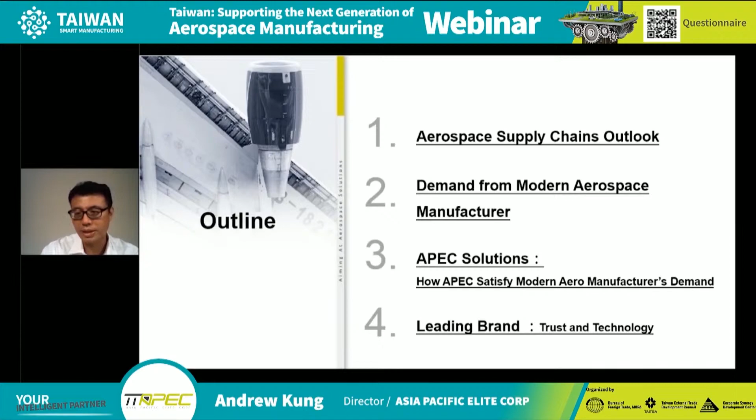Finally, I will tell you about advanced aero engines. It means that for the next generation of the aero engine, they need a very complicated machine to do the complicated casing, the complicated material, maybe combining nickel-based alloy and composite material. So in this trend, you will find the customers don't need just one machine, they need a whole production system.

And the second topic, I will share the demand for modern aerospace manufacturing. In this page, you will find the shape of a pyramid. It means that the global aerospace supply chain is led by the OEM. OEM means the aircraft maker or the aero engine maker, like Boeing, Airbus, GE Aviation, or Rolls-Royce. So in this area, OEM to Tier 1, the customers need very high automation and machines with very good intelligent functions. And they always ask for customer-made solutions. They can accept the high initial cost investment, but they always ask for very high overall effectiveness.

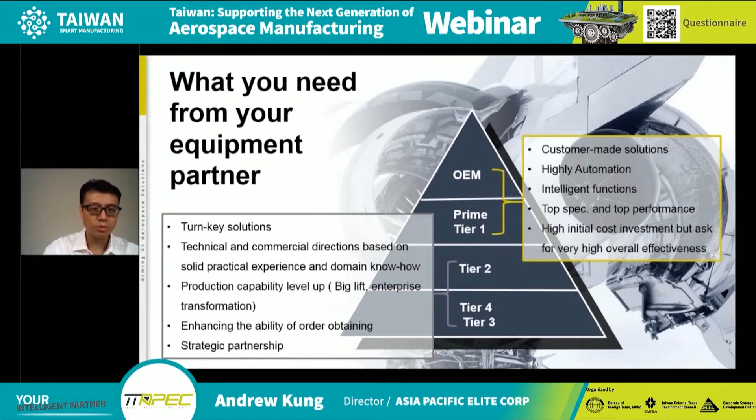So right now we know the change, the demand from the aerospace manufacturers. So the main topic for our seminar is how APEC can satisfy modern aero manufacturers' demand. On this page, you will find that with over 20 years of experience, we can offer the most complete product portfolio for the diversity of aerostructure parts and engine parts. For example, composite structure parts, especially very slim long parts, skin panel parts, or belly fairing parts, which are very huge parts. So we have solutions up to 10 meters to 20 meters.

For aero engine parts machining, from the blisk or the casing in the different segments of the aero engine, from the combustor, the compressor, to the intermediate segment and the turbine segment, we have machines that can cover from 800 millimeters to 2 meters in diameter of the different engine components. And for structure parts, no matter titanium or aluminum, no matter in the fuselage or wing structure, right now we have the full range of machine tools fit for the different requirements, from single spindle to multiple spindle and full 5-axis machines, and even over 20 meter machines that fit the different customers' requirements.

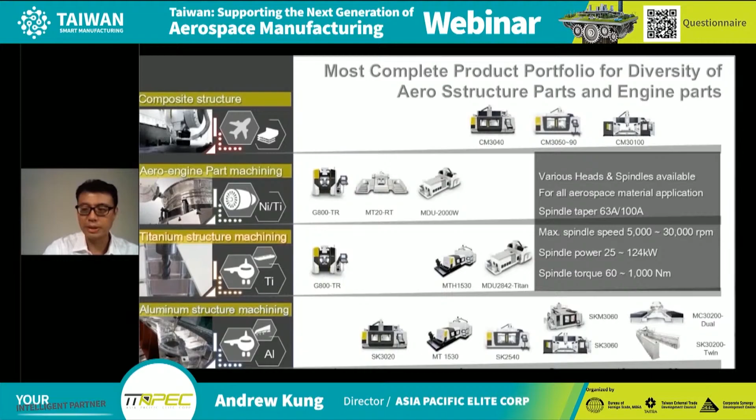So on this page, I will tell you that not only the machines, right now we have the capacity to fit the customer's very special requirements. It means turnkey solutions. If the customer gets a job but doesn't have similar experience or the technology, we can help to do the job study, and we do the time cost study. We help the customer build up the full preparation before machine installation. And after machine installation or production line installation, we can help the customer quickly start up and run up to their break-even point in a very short time.

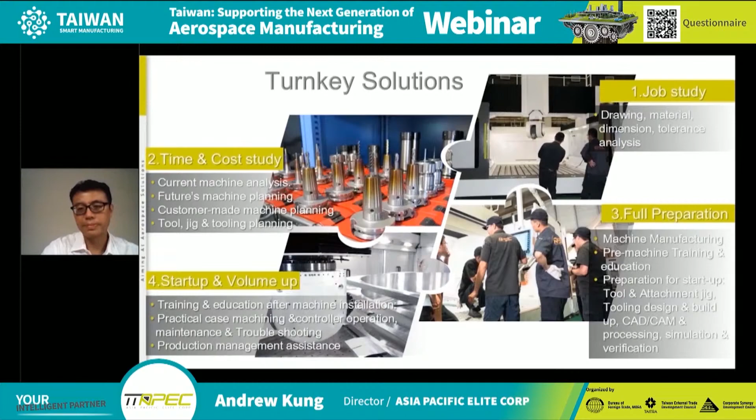Talking about smart manufacturing. Just like I mentioned, more and more customers need internet of machines or smart factory functions. So right now we have two kinds of solutions. One is line management, another is TIMS, meaning the intelligent manufacturing system. It means we can link all the machines to do monitoring and management, and we can develop for the different machines by customer requirement, including tool management, intelligent monitoring, or workpiece management. So we can give full support in smart factory functions development.

More and more customers right now need automation. Even though the supply chain outsourcing is from North America and Europe to Asia, it is not based on the low cost of Asian countries. They also need a high intelligence system. So more and more customers need automation. We can offer machines with a pallet change system or multi-pallet system. And we can even offer the flexible manufacturing system, like Joey showed. We can also give robot applications and a central chip disposal system.

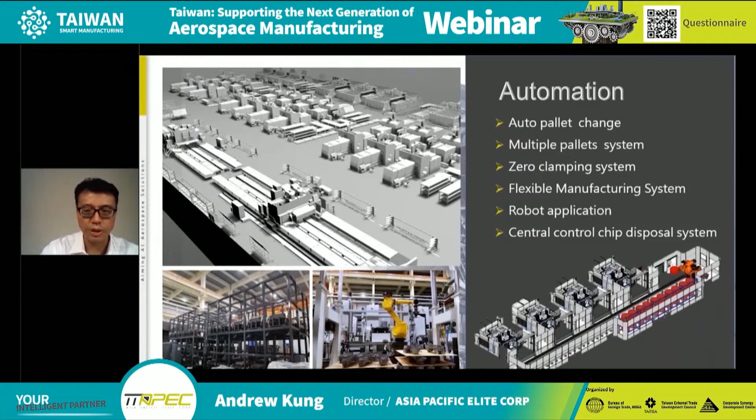When customers set up the production system, they always worry about talent. They don't have good labor capacity, and they don't have the operators or programmers. They don't have high level operators. So we can give a program. In the different countries, in the different aerospace clusters, we cooperate with academic institutes. We train the students and graduates to support them to get certification from APEC, and we give full training. After they graduate from this program, they can go to our customers directly. So it's a long-term relationship. We also try to devote ourselves to leveling up the whole aerospace cluster's capacity.

In this page, I want to show you our strategic partnership and the long-term relationship. It means that in the first stage, we try to guarantee the customer's production capacity. And the second stage, we help the customer to be the leading company in their industry, in the competitive environment. They try to be the leading role in their competition environment.

And the third stage, we try the best to keep the customer. They can keep the continuous growth, and we try so they can get a very good profit through our long-term relationship and through our complete product portfolio, our all-round service and our all-round technical support.

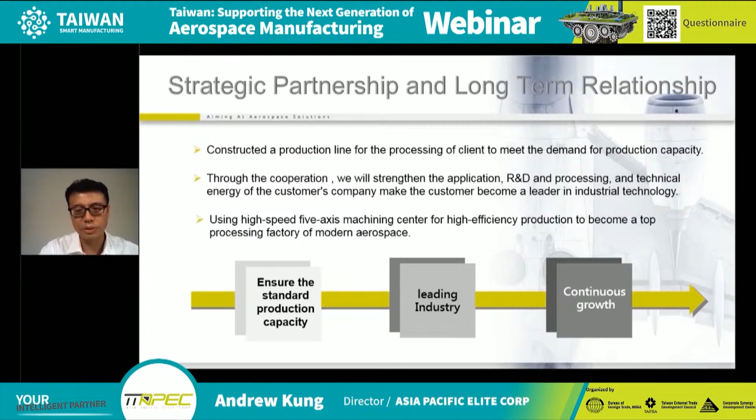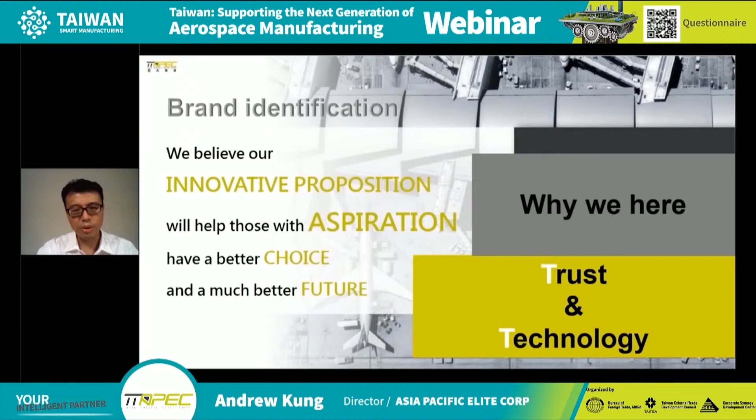So here I want to emphasize again why we are here, why APEC. We try to be the very unique aerospace machine solutions provider. So we build up the relationship based on trust and technology. And we believe our innovative proposition will help those customers with the aspiration have a better choice and a much better future.

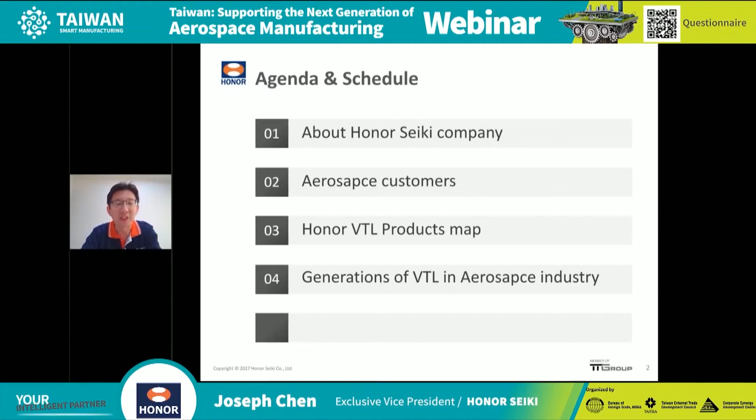Okay, thank you. So I'm Joseph Chen, I'm from Honor Seiki. Honor Seiki and APEC belong to Tong-Tai Group, and we have a similar philosophy and the same working attitude to work with our customers. So today is my agenda. The first portion will be about Honor Seiki company. Second, aerospace customers. Third is our vertical lathe products map. The last one is generations of vertical lathe in the aerospace industry.

So first about Honor Seiki, about us. Our mission is to listen to customers' voice to become their most valuable vertical lathe builder, by innovation, responsibility, and sustainability. We are located in Taiwan, and we just make vertical lathes. We just focus on vertical lathes and offer turnkey solutions to our customers.

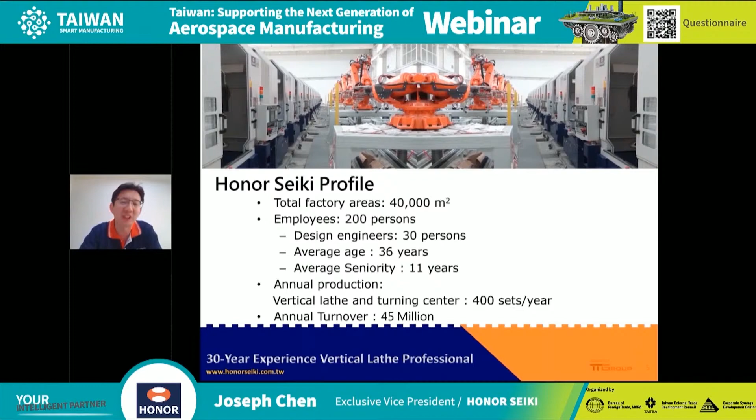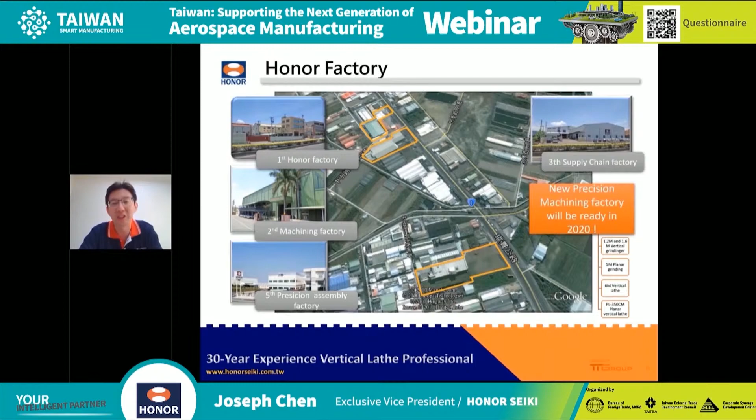We are pretty young, average age 36 years old, but we also have 30 years of experience. We build about 400 sets of vertical lathes per year, and roughly 30% of our products are sold to aerospace customers. We are all located in Taiwan. We have 5 factories right now, and even though it is a little bit difficult time for us this year, we're still expanding because we are also building our new machining shop.

So about our history. In the year 1999, we already sold the first vertical lathe into the aerospace industry. In the past 21 years, we cooperate with our customers, listen to their requirements, see the challenges they had, and try to offer solutions to extend the performance of our machines and make them more profit.

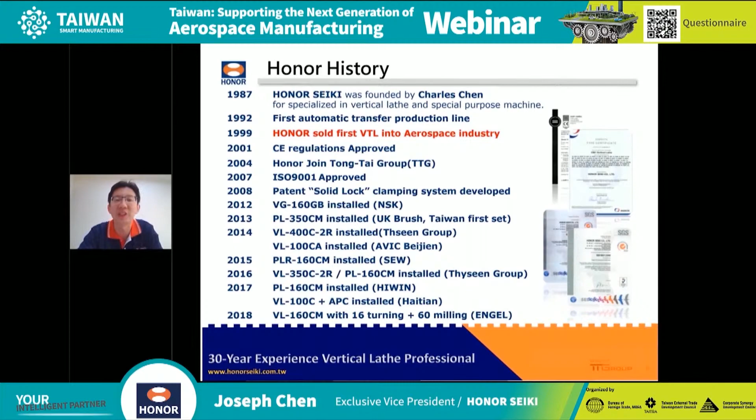So here is some gallery of our factory, and the character of my factory is air conditioning inside, especially in summertime, when Taiwan is 35 degrees. Air conditioning for 2 reasons. First, to make the machine stable. Second, to make my engineers happy. If they are happy, they will make happy machines for my customers.

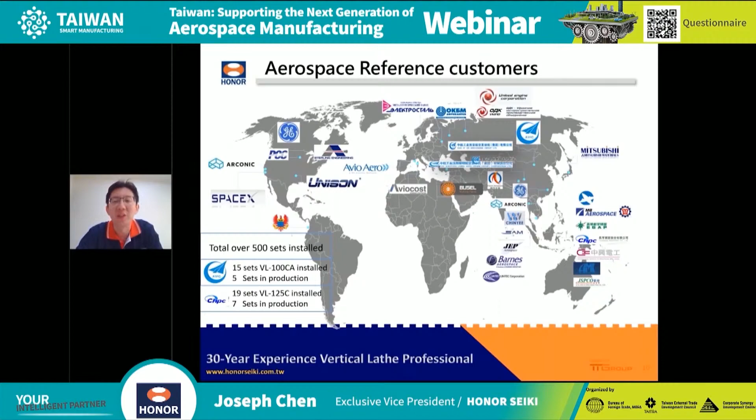And second is our aerospace customers worldwide. So here are some reference customers worldwide, including in America, GE, suppliers including Arconic, PCC, and even Unison. And then, for example, SpaceX, they fly the rocket. We are proud of them. And in Europe, all the Safran suppliers are our customers. And in Singapore, in Taiwan, we have very high market share.

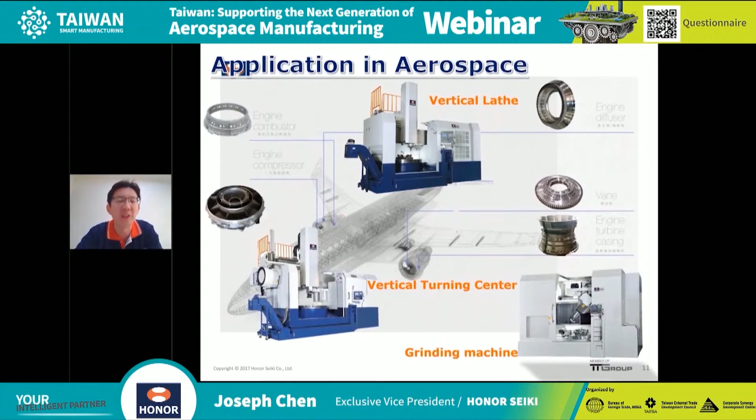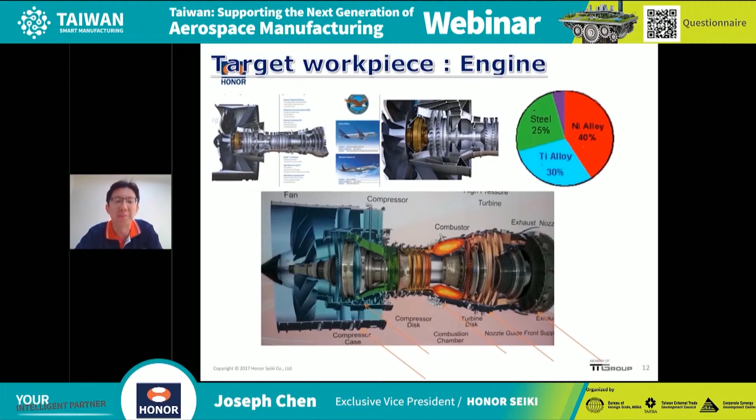So the target workpieces for vertical lathes, most of them are combustor, compressor, casing, and engine. This kind we call hard turning material, like nickel alloy, titanium, or Waspaloy. According to the new engines, for example the LEAP engine or some other new engine coming to this world, the material right now is 30% titanium, nickel alloy 40%, and some special blades are made of Waspaloy.

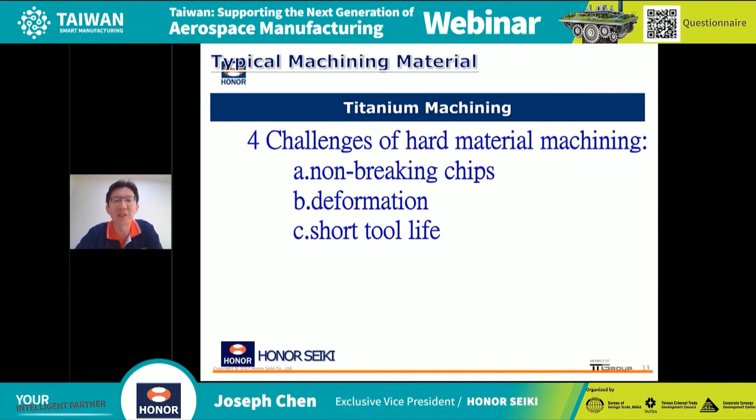So actually for this kind of hard turning material, there are 3 challenges. First is non-breaking chips. The engineer needs to stop the machine to clean chips. Second is deformation. They need to stop machines also. Third is short tool life. These 3 challenges make machine utilization very low, less than 50%. So for the customer, stability, rigidity, and efficiency of the machine need to be considered.

So according to that, finally, I will offer our solution in the last page, and now I will come to our vertical lathe product map. It's our whole vertical lathe line. If we look at the orange line, we call it the standard vertical lathe, and the upper line is the blue line.

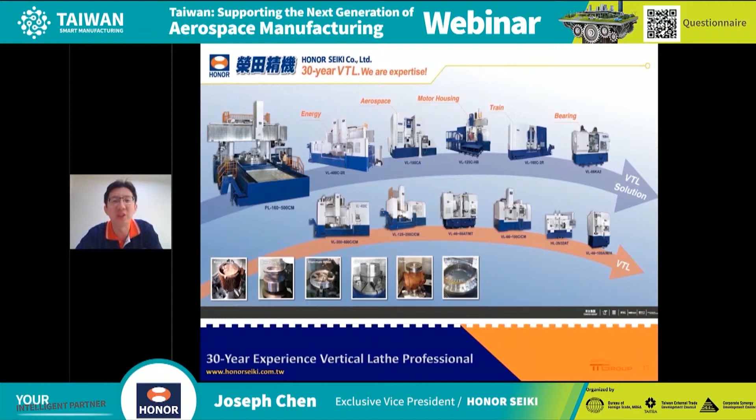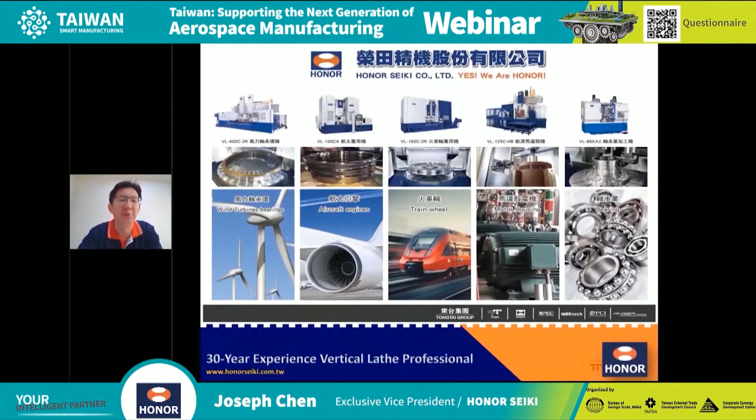We call it the VTL solution line. The solution line means we offer total solutions, for example, to wind power rings, to aerospace, to train wheels, to motor, or to bearing makers. So we use different technology in different industries. For example, hard turning for bearing technology, high pressure coolant for the aerospace industry, and the super heavy and strong structure for the train wheel solution. So we combine and transfer different technology across different industries, and this is a very reliable technology for the customers.

And then I will quickly introduce the different generations of vertical lathe for aerospace. The first generation is, I'd say in one word, reliable. So the first generation is a reliable vertical lathe for customers. We installed over 300 sets worldwide. In the second generation we upgraded the machine rigidity, machine structure, and the clamping system, and the other things necessary to increase machine rigidity. So by this way, in the second generation we increased tool life by 20 to 50%.

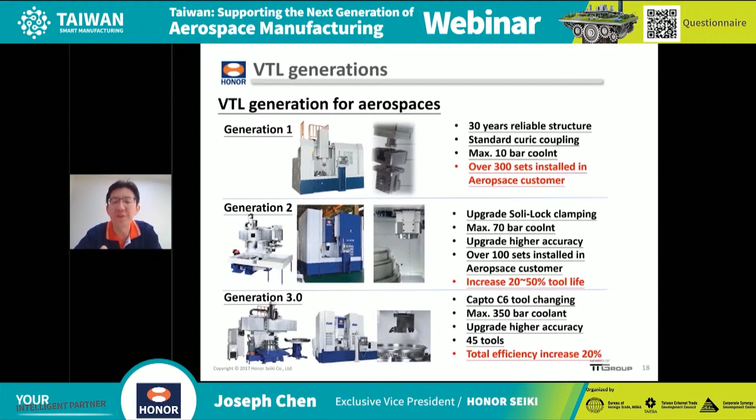And the third generation is efficiency. So we redesigned the machine with 45 tools, and then high pressure coolant to break chips, and then much higher accuracy so that we can use online measuring. So by this way, total efficiency can increase 20%. So based on that, we can offer more tools and more solutions to customers.

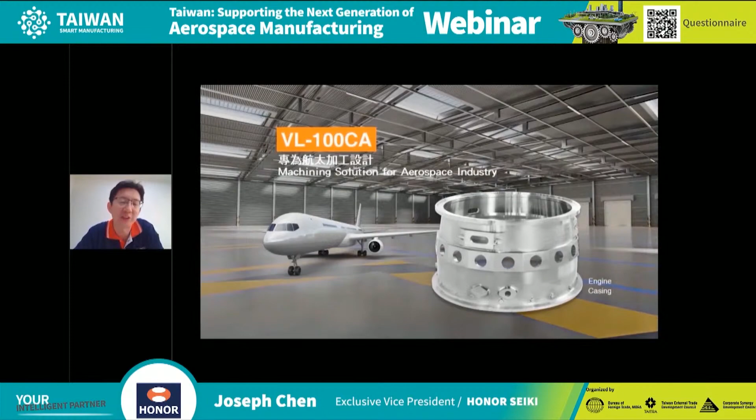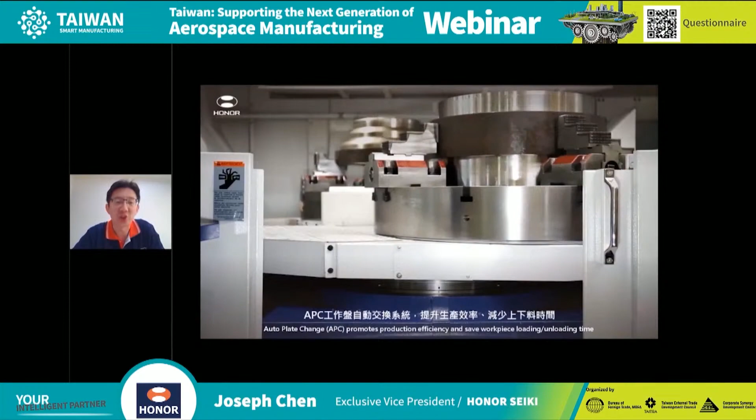And then I will play a video of the latest generation for customers, and you can take a look at this one. So this machine is 3.0 plus pallet changer. With this kind of pallet changer, we can make a pallet change within 30 seconds. So this is about a 1 minute video. This is an automatic pallet changer, 30 seconds to change 1 pallet. And then the stroke for the X-axis and the Z-axis.

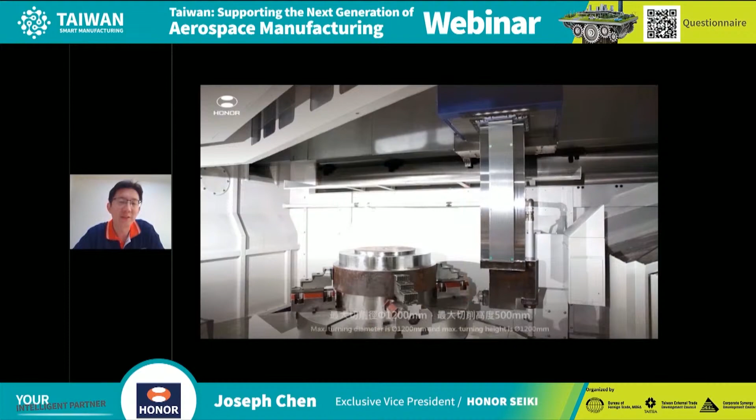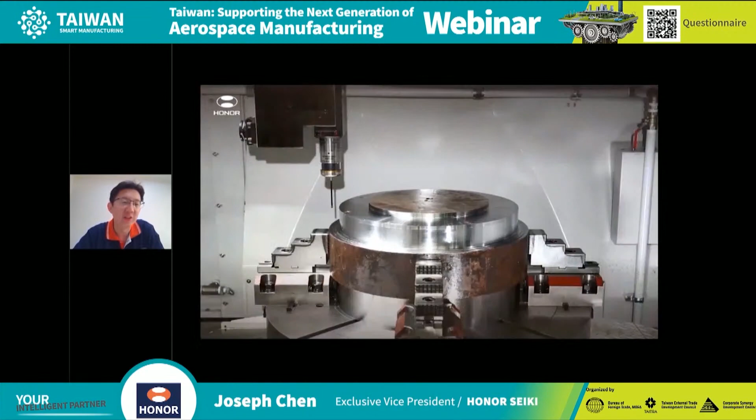And then this is a very high accuracy and high speed spindle. So by increasing the machine rigidity and accuracy, we can use online measuring, then we can get accuracy. So this is the automatic loading and unloading RFID tooling system. So this is a 45 tool capacity. And then by online tool presetter and the proper calibration system, we can do all the turning and measuring online.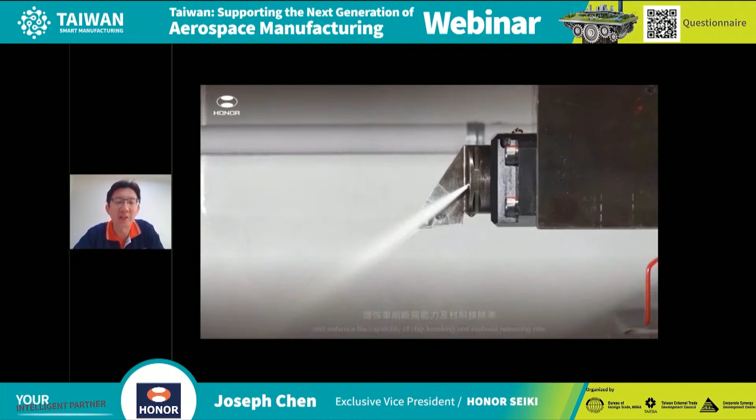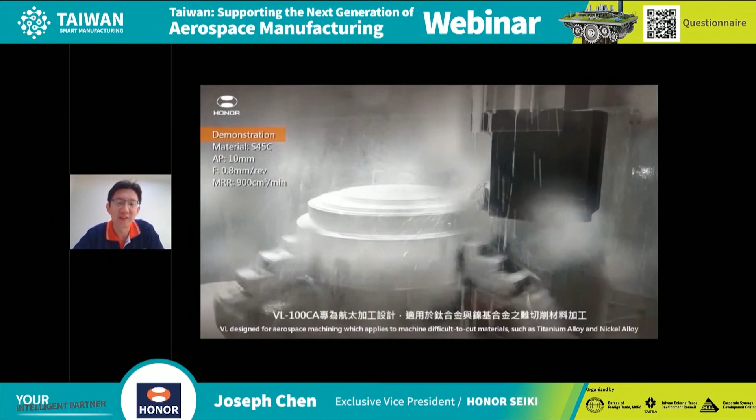So with 100 bar high pressure coolant, you can see the chips can be broken. Okay, so this is finish turning, using a very high precision cross-roller bearing. Okay, so our philosophy is to be an aerospace success partner.

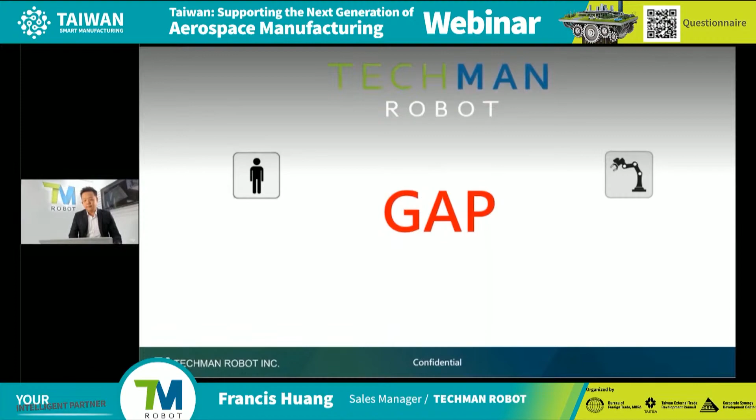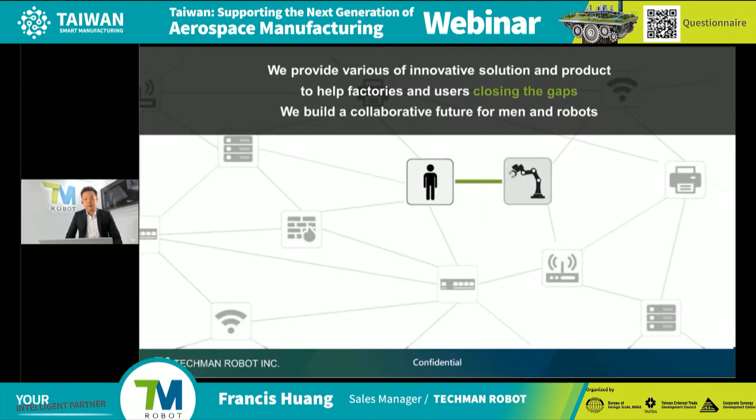Well, at the beginning, we found that traditional industrial robots are very hard to use. You have to be very familiar with robotic language. Otherwise, it's going to be very tough for people to program for a specific application. And there is the gap. This gap is about friendliness, and at Techman Robot, we innovated something, and we'd like to close this gap. So we provide various innovations and products to the market to help factories and users close the gap. We build a collaborative future for mankind and robots.

Just a little bit of information about Techman Robot. We were established in 2016, so 4 years old right now, a pretty young company. But behind us is Quanta Group. Quanta Group is one of the most famous and valuable computer OEM companies in the world. Okay, so about Techman Robot, we have capital of about $16.67 million US with more than 500 employees globally.

And we have our headquarters here in Taoyuan City, Taiwan, with branch offices in Korea, Shanghai in mainland China, Shenzhen in mainland China as well, and the Netherlands. Our major purpose is to design and manufacture smart collaborative robots with a built-in vision system and provide automation solutions to the market. At the moment, we are at the second place.

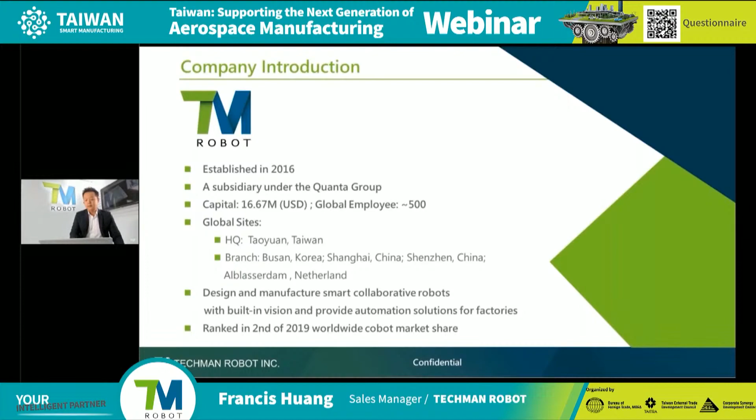This is the map where you can find us in different regions: North America, Central America, and South America, Europe, China, Japan, Korea, Taiwan, and even Australia. We have a very well-done distribution channel there to provide service to our customers.

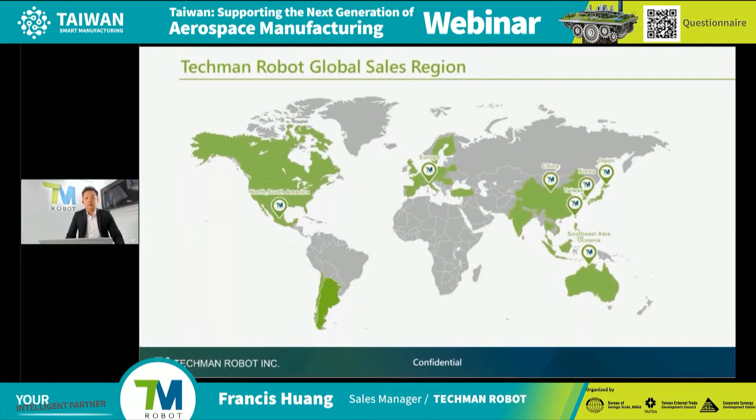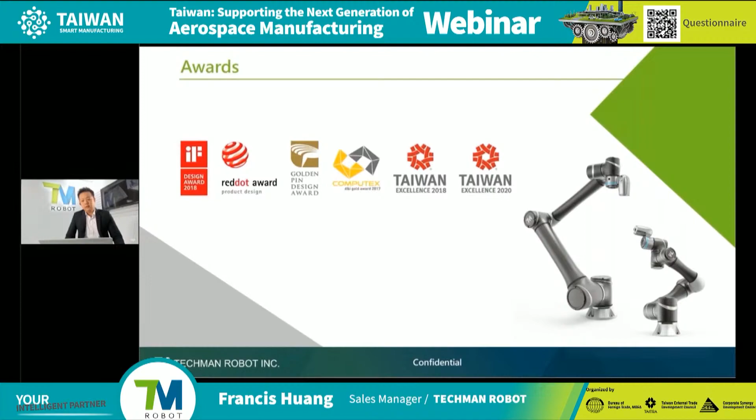These are some of the awards that we collected from time to time: 2017 Computex, 2018 Design Awards, and we have Red Dot Awards as well. And in both 2018 and 2020 we got Taiwan Excellence.

So back to the question, why do people need Techman collaborative robots to help them in their production line? I will say 3S: smart, simple, and safe. Those are our main characteristics. Smart, with the built-in vision system, it makes things easier. Simple, we provide a user-friendly user interface. No need to be familiar or professional in robotic language, it's just like using your mobile phone. Once you recognize the icon and understand its meaning, with some simple logic, you know how to use our robot.

Safety is always our first priority. Whether it's CE certification, 15066, or 10218-1, those are all safety standard certifications that we have. And we also have other safety standards for different markets, and you may check them out on our website.

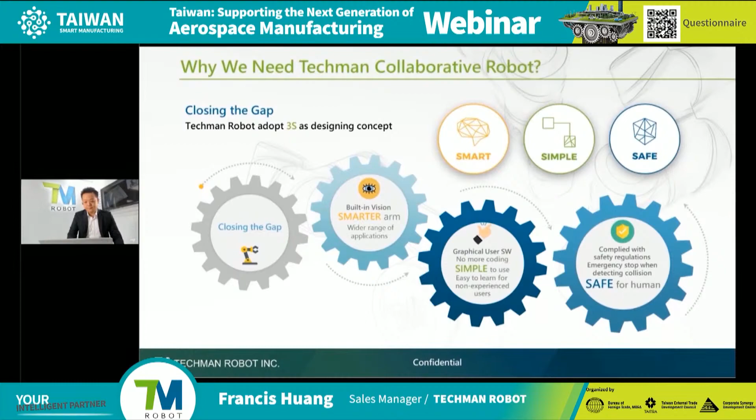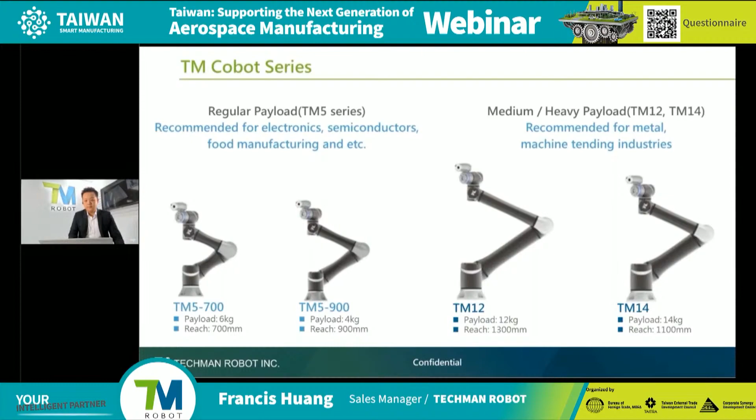About our cobot series, we now have 4 models, differing in payload and reach, 4 kilograms to 14 kilograms, 700 millimeters, 900, 1100, and 1300 millimeters. But you might notice that all the models come with a vision system. And we also have a model for AGVs or any auto car that can work along the production line.

So here I've got a video clip about aerospace that I would like to share with you. Aerospace case study, AIDC. It is a leading aircraft company, one of the most famous, with more than 5,000 highly skilled employees. This company has 4 major business entities, and this application comes from one of them, the aero engine factory.

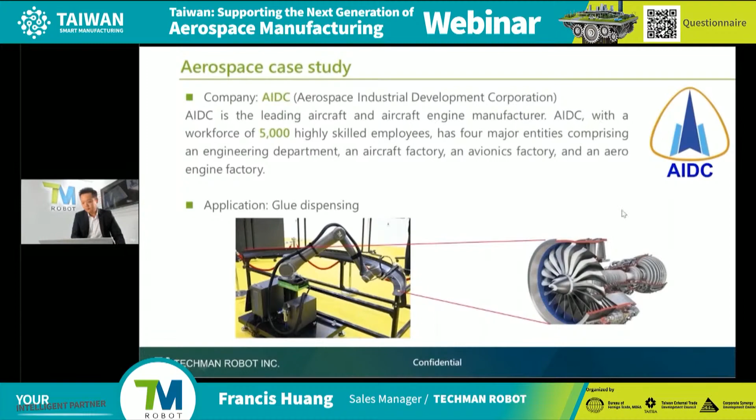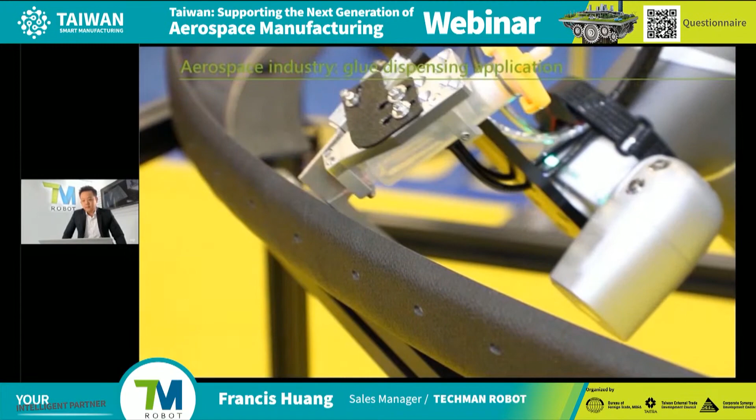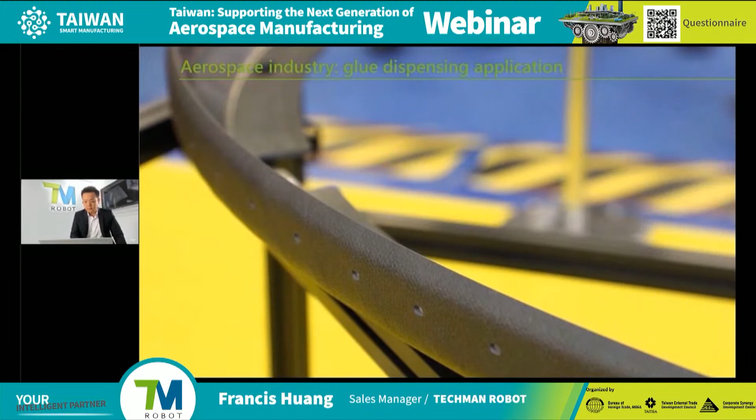The object you can see on your left-hand side is a quarter-circle component of the airplane engine, which you can see on the right-hand side, right? So this is the video clip that shows how we manufacture the aerospace parts. You can see the robot arm is following the path, the edge of the part, to make sure it is well glued. You can see the arm follow the edge very clearly, very carefully.

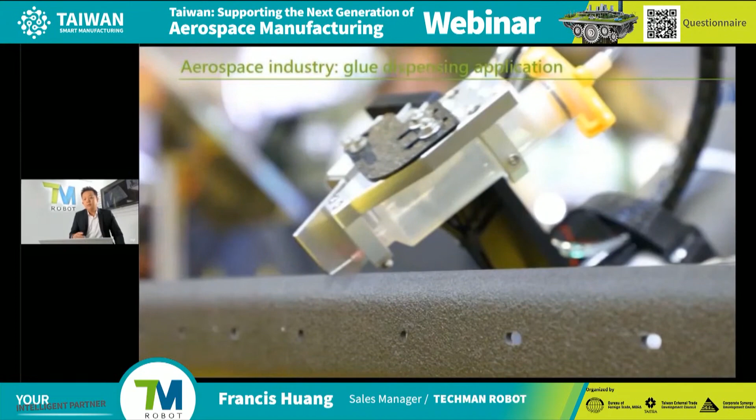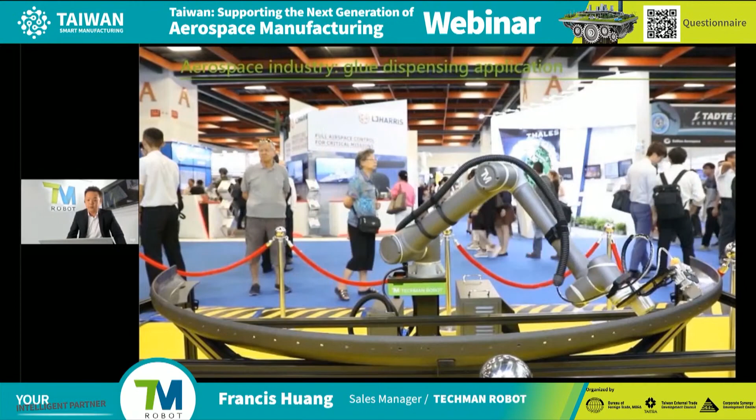This object has to finish one side and then automatically turn to the other side to make sure all the edges of the quarter circle are well glued. We played this demonstration in one of the exhibitions to show what we can do, what our capability is. All those jobs used to be done by laborers. It not only cost a lot of time, but it was also hard for management to control the quality and the yield rate.

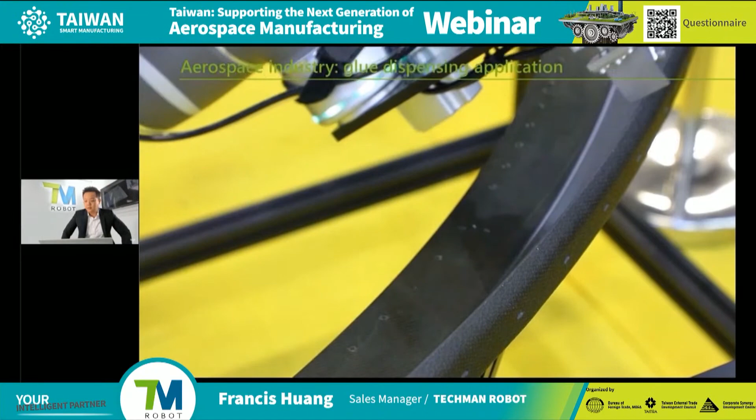So this application with Techman robots actually decreased the cycle time by about 90% and saved the factory 2 laborers' costs, while increasing the efficiency and the performance quality.

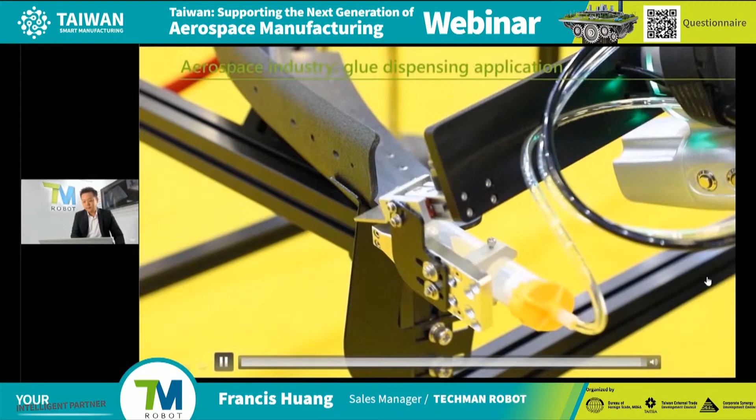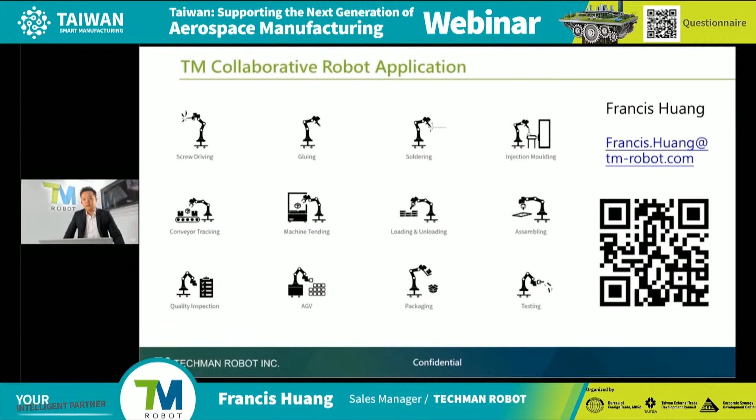My name is Mel Gay. I'm Regional Sales Manager for YCM Technology, Yeong Chin Machinery Industries Company Limited. For those of you that may or may not know, YCM was founded in 1954. It has 66 years of experience in machine tool manufacturing. Vertical, horizontal, double column, 5-axis machining centers, and CNC turning centers are all quality products produced by YCM.

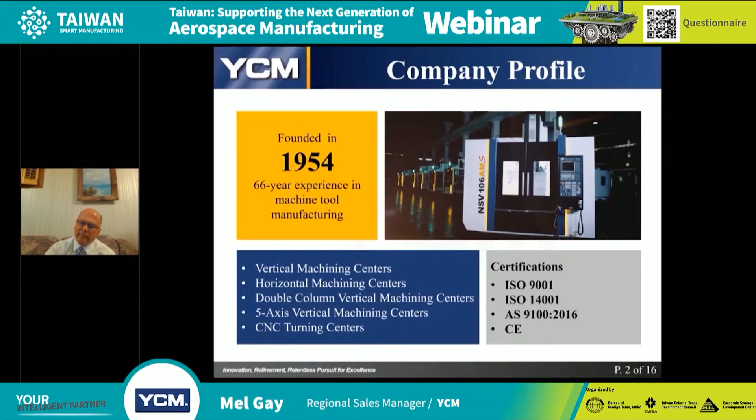Certifications in ISO 9001 and 14001 show our dedication to the quality of our build-up products as a vertically integrated company. We have a worldwide sales network of over 50 sales and service locations globally.

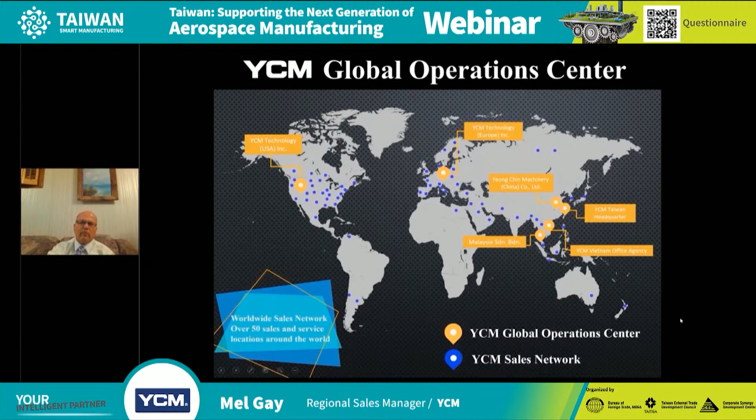From engineering and design to pouring our own castings in our foundry, precision machining, best practice assembly, quality control, and shipment and packaging to our customers, YCM is dedicated to producing products in our vertically integrated factory. YCM services many industries: aerospace, automotive, die mold, micro machining, and job shop are just some of the various customers we service.

Let's take a look at the aerospace and defense industries. These components, whether they're aircraft components, artillery, weaponry, tanks, radar, or other military equipment, comprise a large portion of a market segment. Either these components, parts, or finished products are manufactured by customers that invest in high precision and highly accurate machining. Technological advances play a key role in these industries.

Let's talk about the aerospace market forecast. Boeing has predicted over the next 20 years 44,000 new planes valued at $6.8 trillion. The commercial aircraft will be $3.1 trillion in coming years up to 2028. Aerospace and defense will contribute to this industry and are highly stable, which allows for various diverse applications of equipment and supplies. Some of it will be in the service sectors, as well as defense and new aircraft sectors.

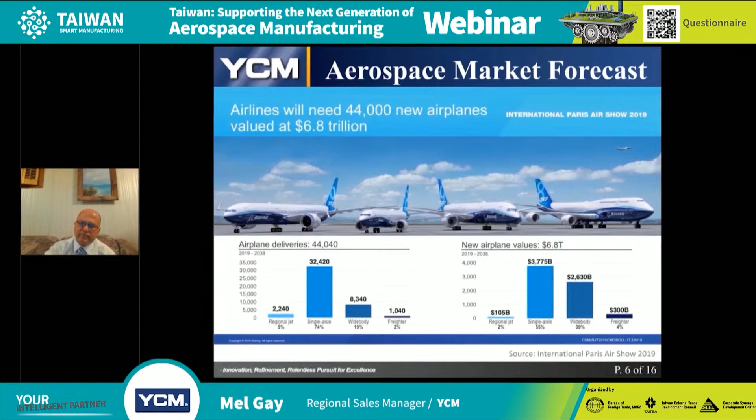However, in 2019 this was a $770 billion industry. In 2020, it is expected to decrease to $704 billion, which is a minus 8.6% compound annual growth rate. This is due to the COVID-19 outbreak and the steps taken to control it. The aerospace industry offers a wide variety of parts. These parts require the equipment to be complex and highly accurate.

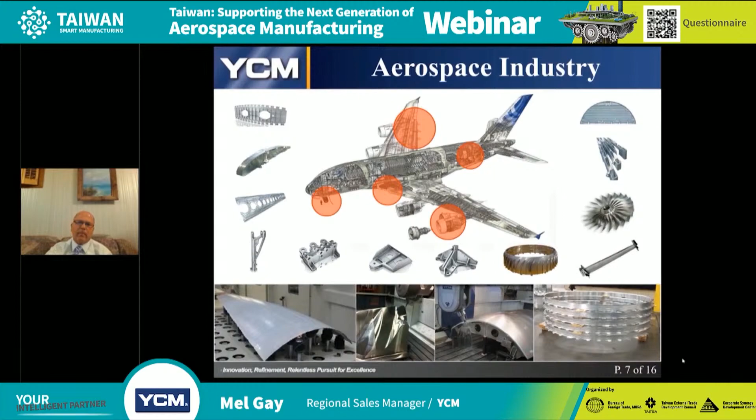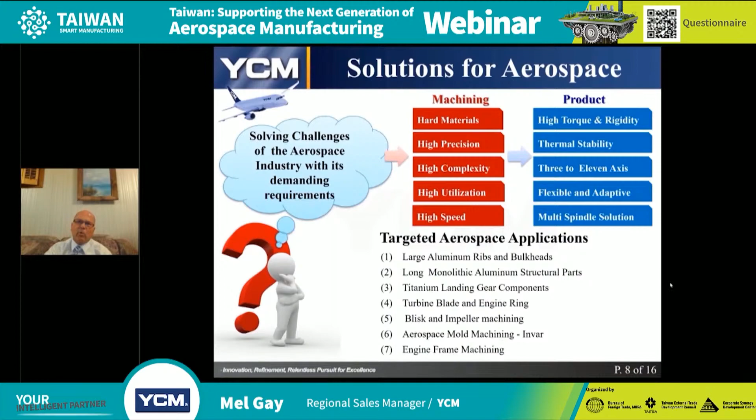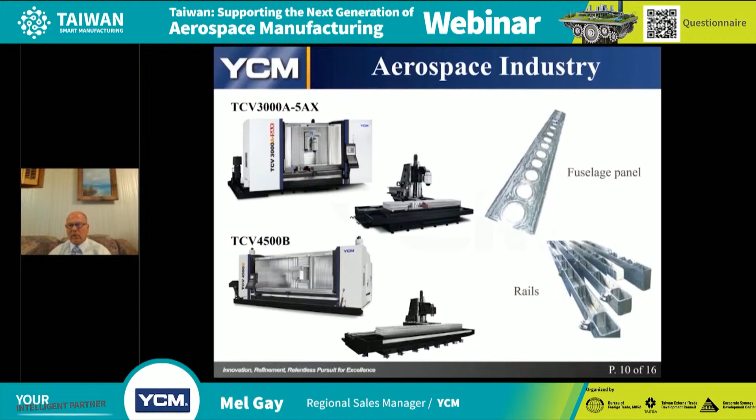On this slide, you will see fuselage panels, which have small, thin walls on them. These fuselage panels fit our 3-axis TCV products. The TCV offers both the space and the length to accommodate these parts, as well as the speed and accuracy to hold the part tolerances. The structural rails on this slide require compound angles to be machined into the materials. Our TCV 5-axis machines put these in to the customer's specifications.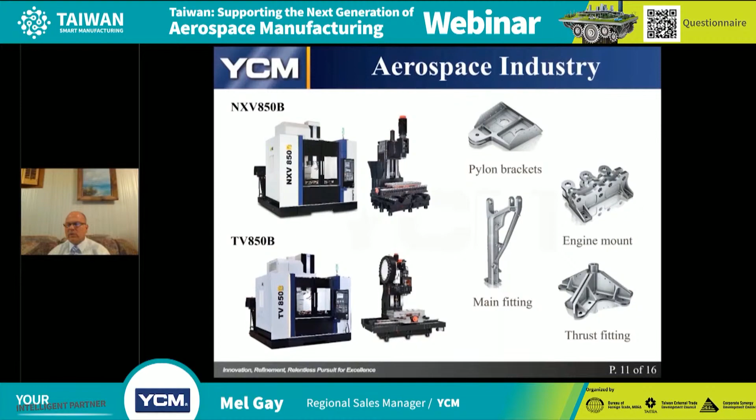Pylon brackets, engine mounts, main fittings, and thrust fittings are all made from exotic materials. These exotic materials can require high speed and high feed rates, such as our NXV machines, or they may require high torque and high thrust, such as our TV series of machines. Turbine blades have compound angles as well as very precise mounting flanges and tangs. Our TV 158B series of machines combine high speed as well as high accuracy in putting in compound angles.

If you look at the engine ring, there are four series of flanges on this ring internally. Each ring has a high precision hole, either straight through to the next flange, or some of the holes are put in at compound angles. Our horizontal machining centers offer 4-axis precision positioning, which allows for these compound angles as well as straight holes to be put in to our customers' exacting specifications.

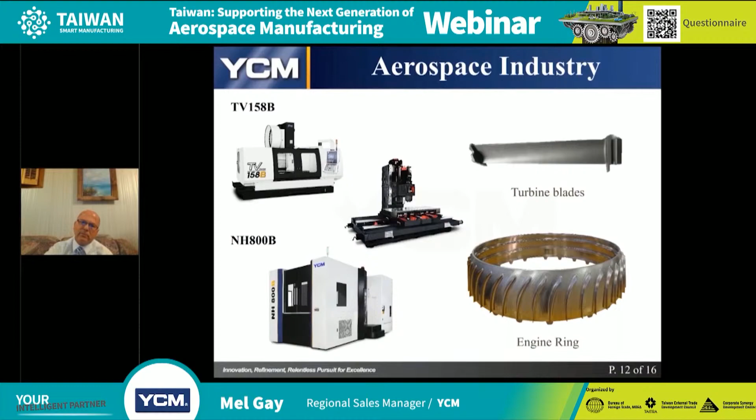Let's talk about blisk machining. This is a combination of the turbine blade with the hub or disc as one part. The blisk has become an integral part of jet engine manufacturing. Our NFP 500A and NFX 630AT 5-axis machines have offered our customers high precision solutions for manufacturing these parts and components.

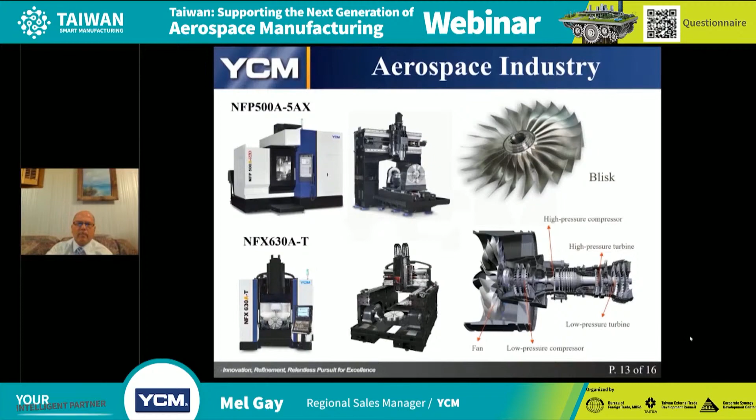Engine frames and bodies are used in the mounting of jet engine components as a unit. These engine frames and bodies have very integral pieces both on the outside and inside of the part. Usually these are made from titanium, which requires a machine to have high RPM, high horsepower, high positioning, and a good amount of user-friendly features in order to be able to process these parts. Our DCV 5-axis offers this to our customers.

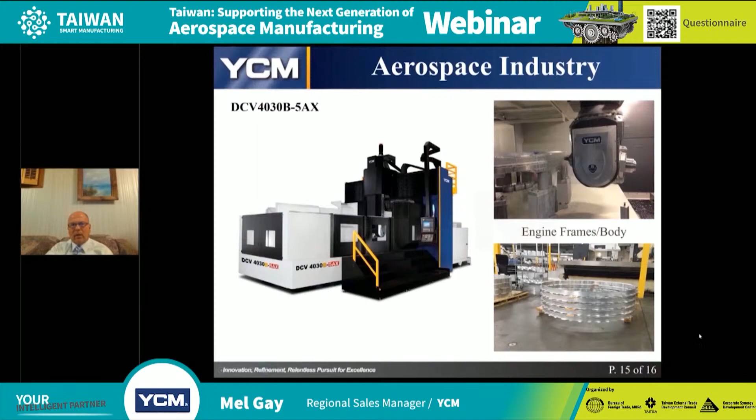I'm from Ken Ichi Machine. We develop and manufacture professional 5-axis machines, and we're located in Taichung, Taiwan, and we have focused on the aerospace industry for more than 10 years. We provide high-speed aluminum cutting, and also high-torque machines for titanium material, and a special machine for engine casing.

So now, the aerospace industry manufacturing requirements are getting higher and higher. So how should Ken Ichi respond to those higher demands? Today, I have three contents I want to introduce. First one is about Ken Ichi. Second is Ken Ichi's key value. And third is Ken Ichi's vision.

In 2009, we recruited 5-axis machine experts to establish Ken Ichi Machine. From the first project for the aerospace industry till now, it has been over 10 years. Ken Ichi has sold more than 300 5-axis machines to countries which manufacture aerospace parts, like the United States, Germany, France, Spain, also Turkey, South Korea, and China. So we are very confident we have very good experience in the aerospace industry.

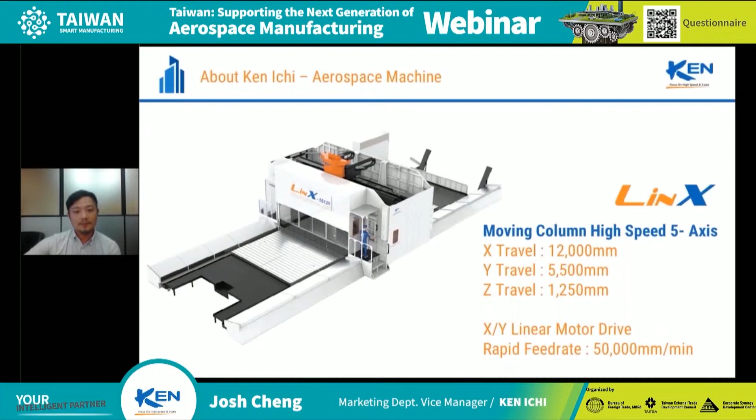And this one is a very long machine. The X travel is 20 meters. It's a double gantry high-speed 5-axis with X and Y direction linear motor drive. Rapid feed rate can reach 60 meters per minute, and this machine can specially machine long parts, and it can also be separated into two machines for middle-size parts.

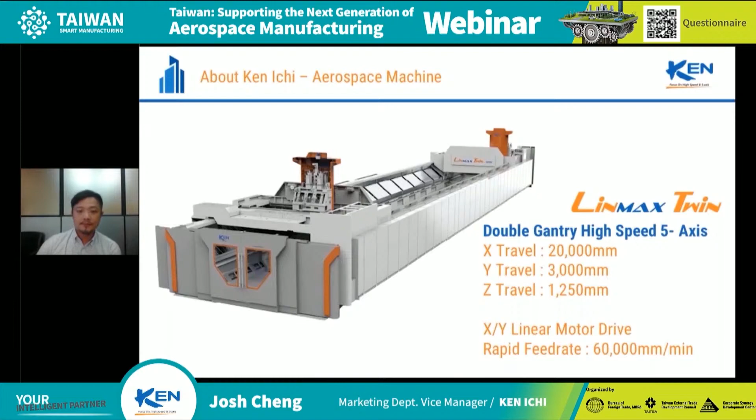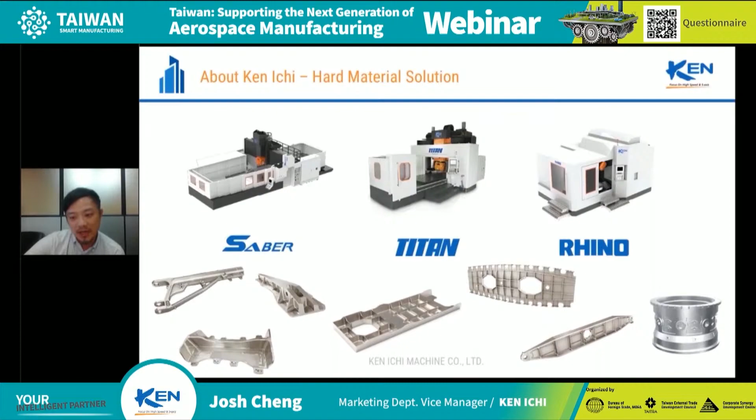And these are the high torque series. Saber and Titan can specially cut titanium material, landing gear, and titanium structure parts. And the Rhino series we designed for engine casing machining for titanium and Inconel.

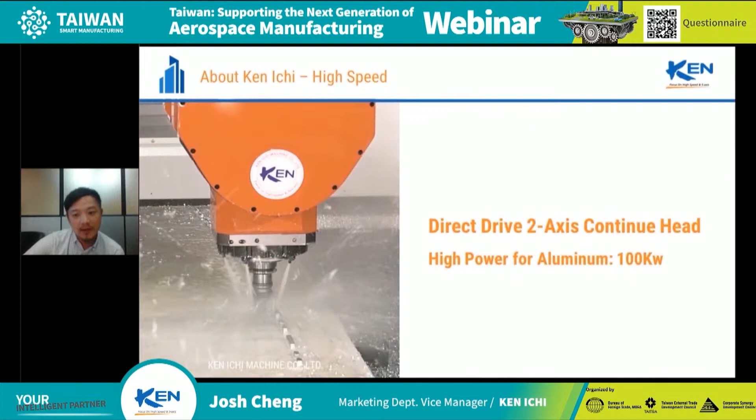For the high-speed machine series, we use the direct drive 2-axis continuous milling head and high spindle power. High power can machine aluminum very fast. We use linear motor technology to replace the ball screw, so linear motors have high speed. This is used in our high-speed series machines.

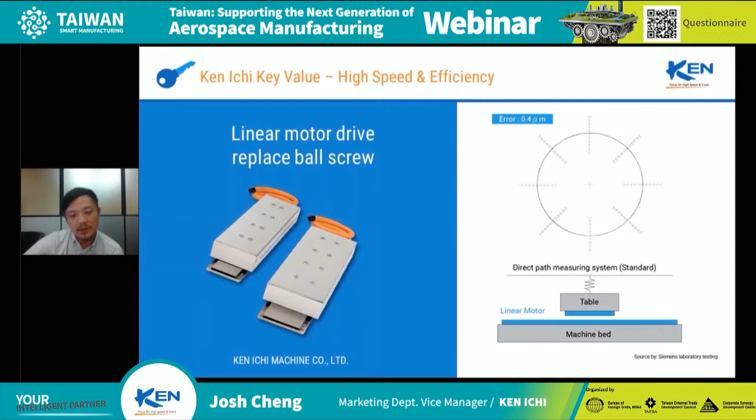And then we use the box-in-box design. This box-in-box design can reduce temperature effects and reduce structure deformation, because it is a symmetric design. So we can reduce the environment temperature effect on the structure much lower. Also, we use 2 hydraulic cylinders, 2 ball screws on the Z-axis and 4 guideways, so it's stronger and more stable.

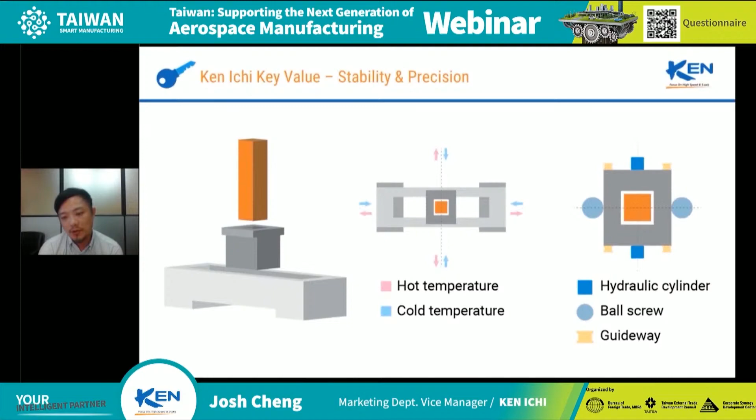For the high torque series, we have the mechanical 2-axis continuous milling head. Also, we provide a 1,200 Newton-meter spindle torque, because as we know, titanium material needs a very high torque spindle. Also, the machine structure has special designs for more rigidity, specially designed for titanium and Inconel, this kind of hard material cutting.

So why Ken Ichi? First one is leading the customer to market leadership. We support technology and close communication with the customer. R&D pioneering through innovation. Why can we support this? Because we assign a representative to each of our customers, to meet the customer's marketing requirements more steadily.

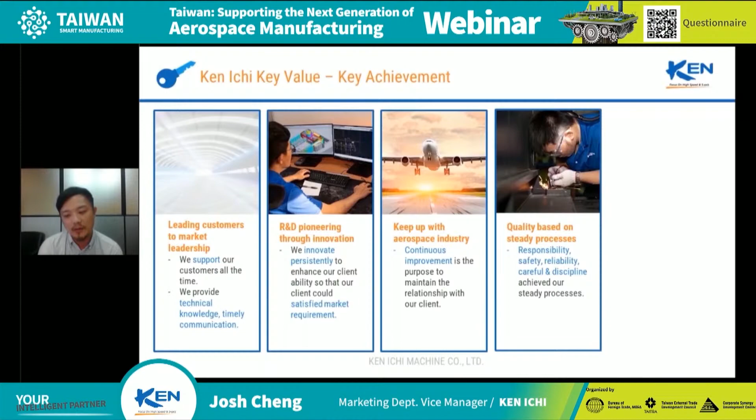So we keep up with the aerospace industry. We continually improve our machines through communication with the customer. We know the customer requirements and improve. Quality is based on a steady process. As we know, the machine is assembled by people, by our engineers. So we have responsibility and safety. We create a very good environment and also use very high-tech requirements to build the machine.

Dedicated employees achieve success. So the team is very important. Each of our employees trusts each other, respects each other, shares all information, and appreciates. And with this environment and this source product, we can make a very good quality machine to provide our customers.

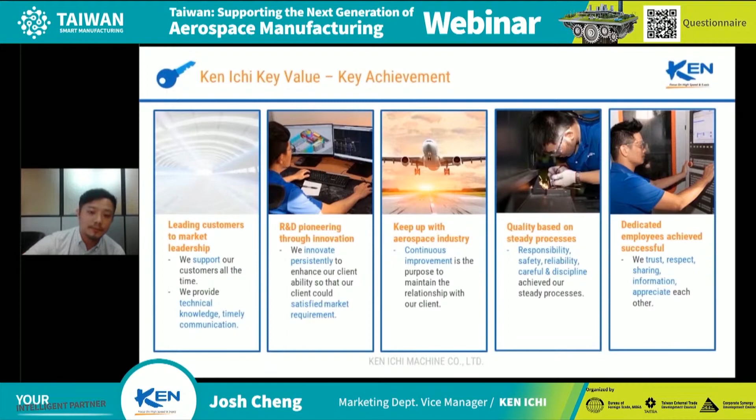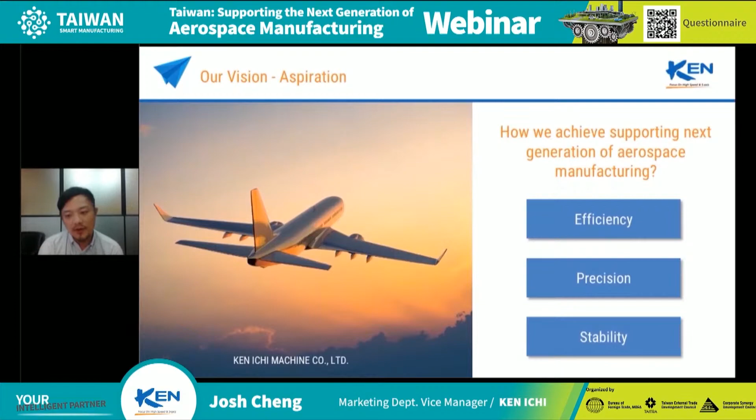So how do we achieve supporting the next generation of aerospace manufacturing? We guarantee to provide machines with efficiency. First, we guarantee to provide very precise positioning machines. We guarantee to provide very stable machines to our customers. So we aim to become an important supplier and partner with you in the aerospace industry.